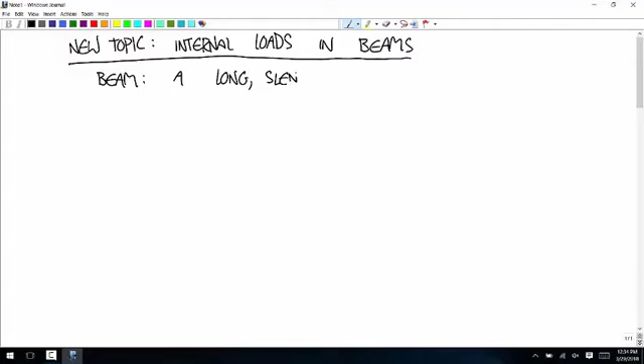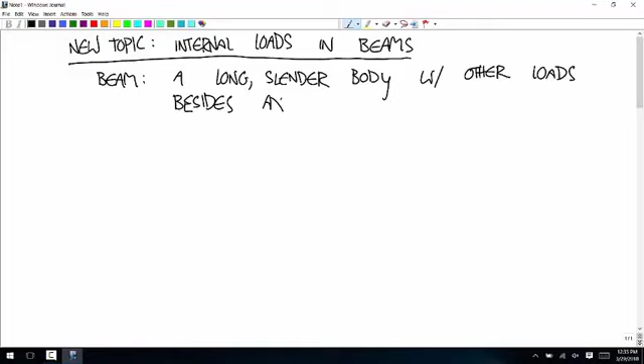And a beam is a long, slender body with other loads besides axial forces. If you have a long, slender body like this and the only loads on it are parallel to the axis, then if the loads are always going to be just axial like that, you don't call it a beam. People tend to just say an I-beam is an I-beam no matter how you load it. But when I talk about beams as a general topic, I'm talking about long, slender bodies that, in addition to axial loads, can also have forces like this, and couples and stuff like that. So these bodies have to support loads that are more than just axial.

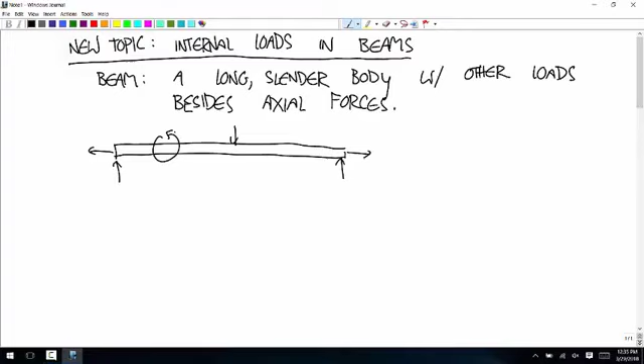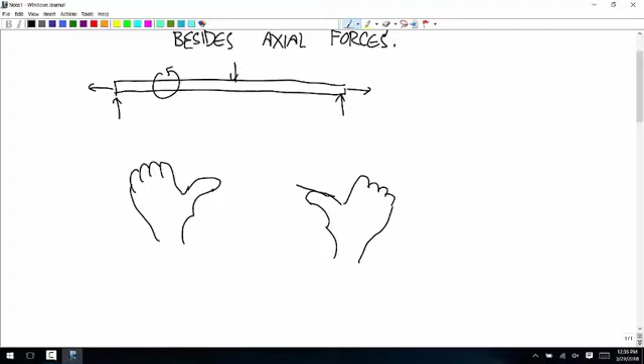And the motivation for internal loads, the best I can think of, is this. So here's you: I'm so strong, I'm going to break this pencil. Don't think you're all cool, anyone can break a pencil. Okay, so here's the pencil. Okay, that was stupid. Yeah, that's true, it's a pretty long pencil.

Okay, so if you try to break this pencil by flexing it, here's the motivation, here's what we're doing. The motivation isn't trying to break a pencil, this is just helping you understand what internal load is about. So what does a free body diagram of that stick look like? So there's the stick. Your fingers are applying a downward force and your thumb's applying an upward force, and there's symmetry, so it looks the same on the other side. Maybe we could call this F, F, F, F, something like that.

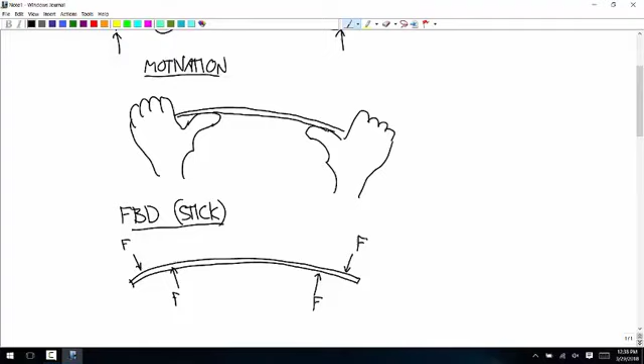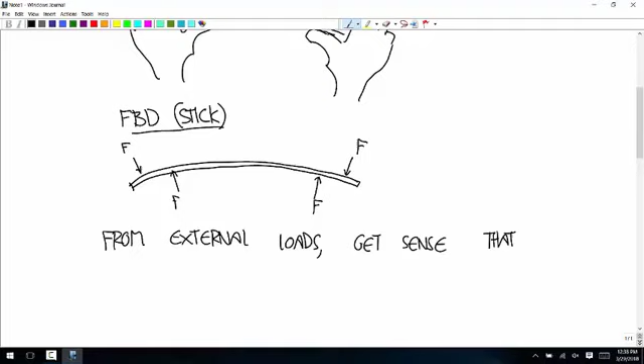Okay, so if all we have to go on are the external loads on this pencil—it's drawn wrong, okay—if all you have to go on are those external loads, and you were asked where this pencil was going to break, if you didn't have any experience bending sticks or whatever like that, you would look at this and you'd say there's 4 places where this could break, one of those 4 places. From the external loads, you'd get the sense that the fracture would occur at one of those 4 locations of those forces F.

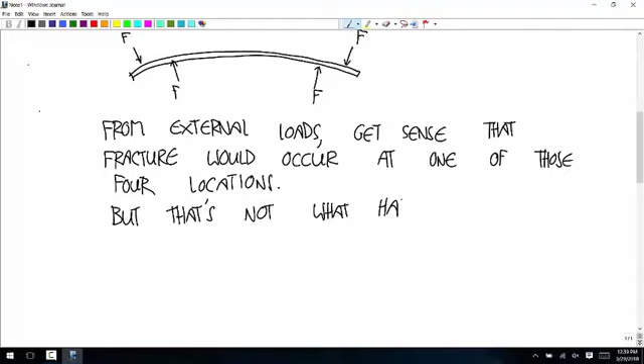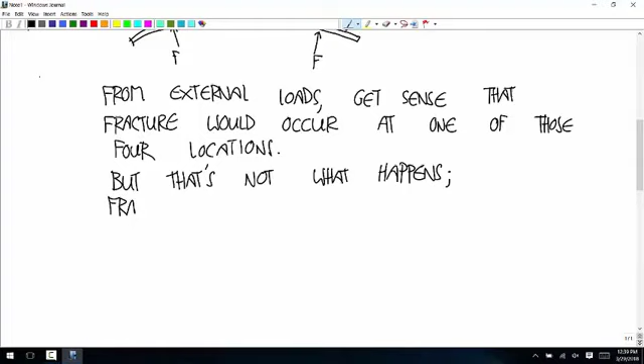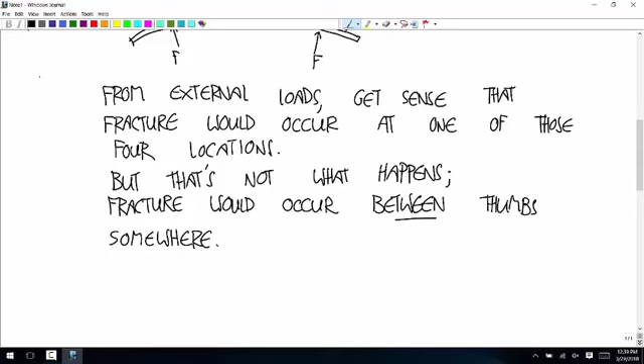But that doesn't agree with experience. That's not what happens. In practice, if you do this, the fracture is going to happen somewhere in between your thumbs. So the fracture would occur between the thumbs somewhere. So if it's not the external loads that determine where something's going to break, we need some other way to measure where a fracture is going to happen. We need another way to predict this fracture.

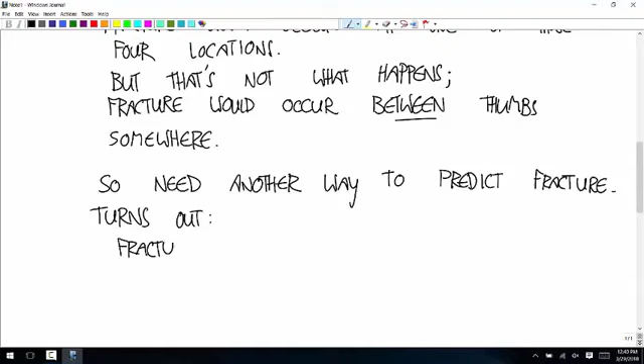And it turns out that fracture happens, that fracture occurs in spots where the material itself applies large loads to the adjacent material. And these loads that the material applies to itself are called internal loads. And so that's what this is about. Really, this is kind of like the first topic where we're starting to get at the question: where is this thing going to break? Or, I guess, is this thing going to break? And if it is, where is that fracture going to start?

Which is going to be a big topic of mechanics, one whole branch of mechanics from now on. So you start with this, and then you go to stress and strain analysis and deformation, and then you keep going in that direction after.

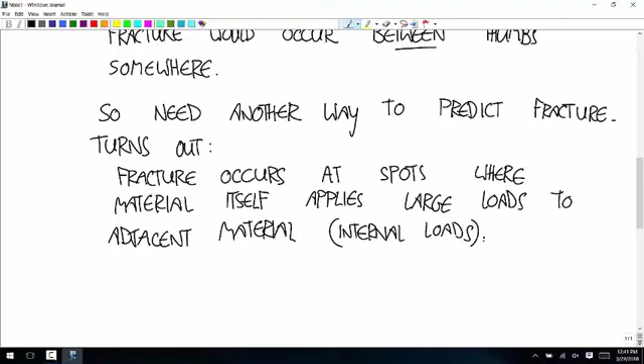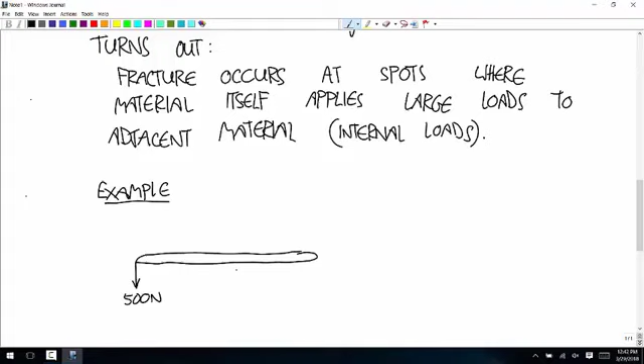Okay, so let's think about how to get at this. Let's say we have this beam, and there's a 500 Newton force at the two ends, and an upward force of 1,000. If you plug this stuff into Newton's laws, you'd see that it's in equilibrium.

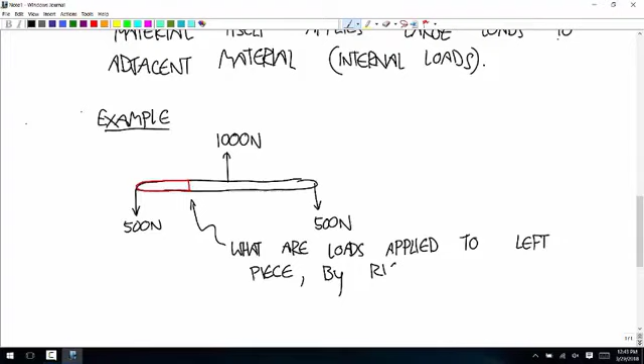And let's say that we want to know, at this point here, what are the loads applied to the left piece by the right piece at that chosen line.

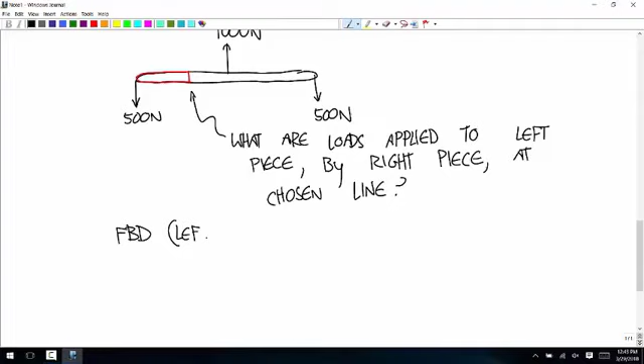Okay, well, let's draw a free body diagram of the left piece. So this is what we're isolating. And, you know, I always say don't do this in free body diagrams, but I'm going to draw an outline of the stuff that we're ignoring just to help you keep your bearings of what we're looking at. Okay, so our free body is that black piece.

There's a downward force on the piece that we're analyzing of 500. That red line happens before we get to the 1,000 Newton force going up. So that 1,000 Newton force would be like here, but we're not looking at that. And then there'd be another 500 Newton force like here, and we're not looking at that.

Okay, so now go around the boundary and look for places that the surroundings apply loads to our chosen body. There's one location that I've missed.

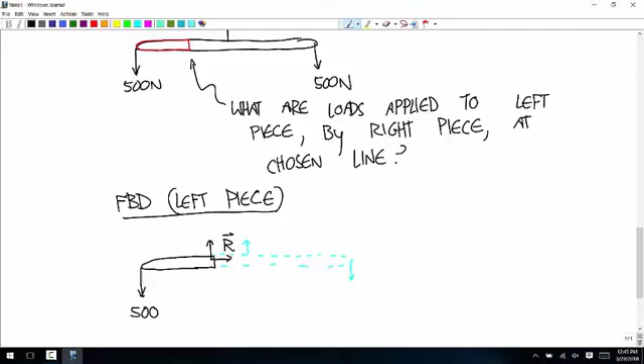That's right. At the contact between what we're—right at that line that arrow is pointing to above—the piece that we're isolating makes a fixed joint with the piece that we're ignoring. So what are the loads that a fixed joint applies? Yep, so we have an unknown force vector, R, and we also have a couple, M.

We want to calculate R and M. Those are the internal loads at that line.

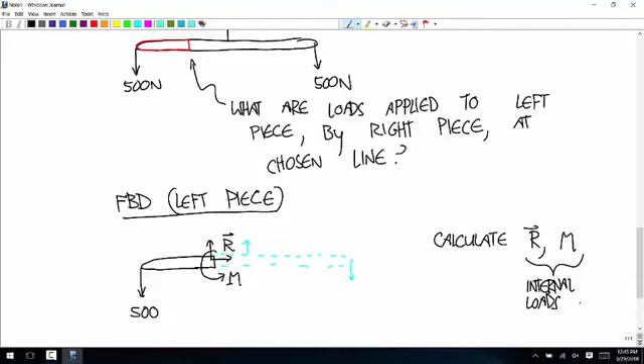So Newton's second law says 0, negative 500 plus Rx, Ry is equal to zero.

And the moment equation—I'll use this as the about point. So there's no moment produced by the 500 Newton force because it acts at the about point. There's the couple M, and I didn't give a distance here. Let's give this distance.

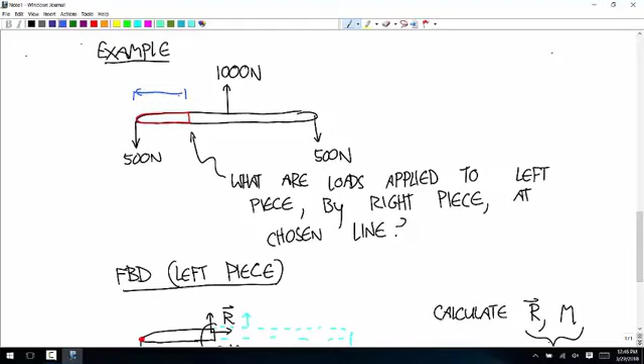So let's say that this is 0.25 meters. This is 0.25. This is 0.5.

Okay, so the x component of that force R doesn't produce a moment because its line of action goes right through the about point. The y component does, though. You see that the y component of that force would make this beam rotate around the about point. What's the moment arm of that y component of R?

So if we have this upward force at the end here, the horizontal distance is 0.25. Okay, so the moment arm is 0.25.

The force vector is Ry. And would that, if that Ry is positive, would that make it rotate clockwise or counterclockwise? Counterclockwise, so this is positive. That's because this is a counterclockwise rotation. And so that's equal to 0.

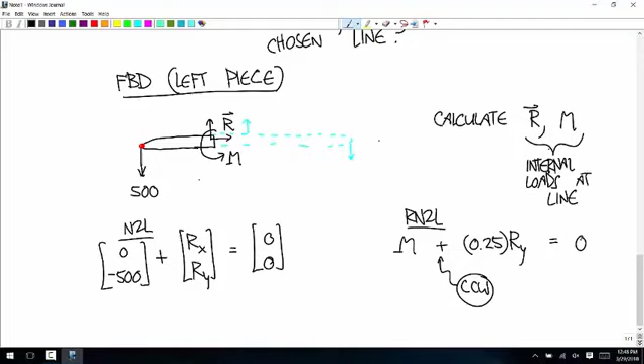And so now this system of three equations tells us that the vector R is equal to 0, positive 500. And the moment M is equal to negative 125 Newton meters.

If we drew a free body diagram for the right half, would the moment be the same? Okay, so that totally anticipates the next thing that we have to talk about with this. So let me ask other questions, and we'll get back to that. That's kind of the next big thing we have to address.

Anybody have any other questions about that idea? So what we have is somehow—we don't know how yet, we don't know how this compares to other parts or how much the material can withstand or anything like that—but somehow these loads represent how likely that beam is to break at that line that we chose, at that point along the beam that we chose.

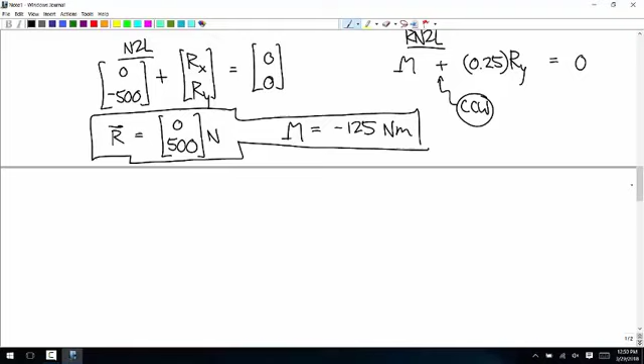Okay, but we're starting out with just a single point. So this is the basic idea. The basic idea is at every point on the beam...

And just as an aside, we're not really talking about points. We're really talking about vertical lines or cross sections. Yeah, exactly.

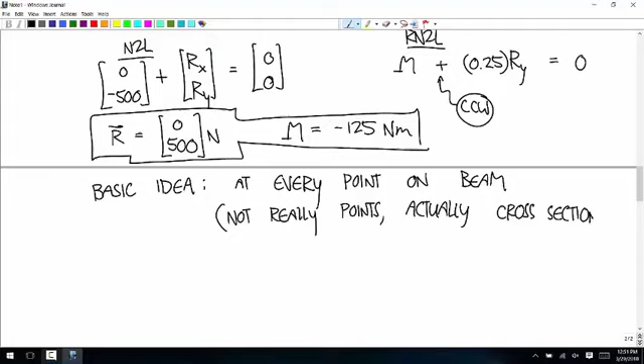We want to calculate the loads applied to the material by the fixed joint with the adjacent material. Okay. And I would recommend that you try to remember that, because...

The next thing we're going to do is going to sort of obscure that simple idea a little bit. But one complication comes up, and that is that we really want to know—we want a set of internal loads that represent, so we want a set of values that represent the internal loads at that cross section, no matter how we calculate it. And the problem is...

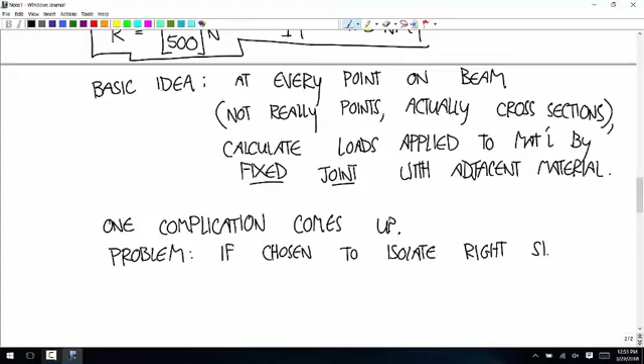If we had chosen to isolate the right side, and calculate the loads applied by the left side, all of our values would have been equal and opposite.

And so we don't really want that. We want to be able to calculate this any way we choose and have the results be consistent. So because of that, we're going to choose a new sign convention that's independent of the vector directions, the axis directions.

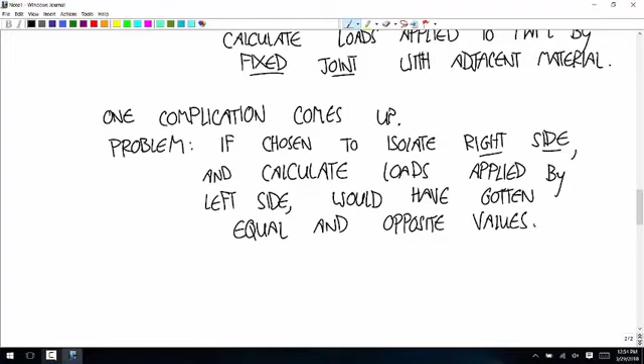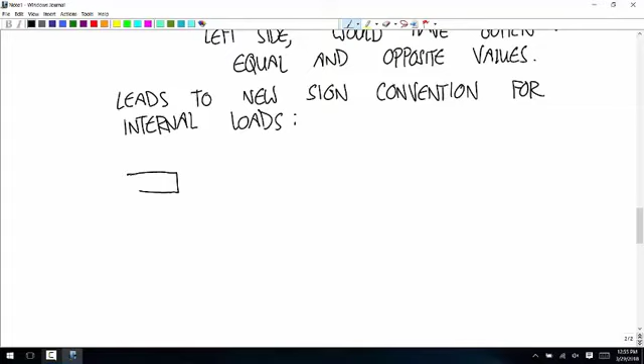And so at the end of the beam, we're going to define those loads applied by the fixed joint as a tension, T, a shear force, V, and a moment, M.

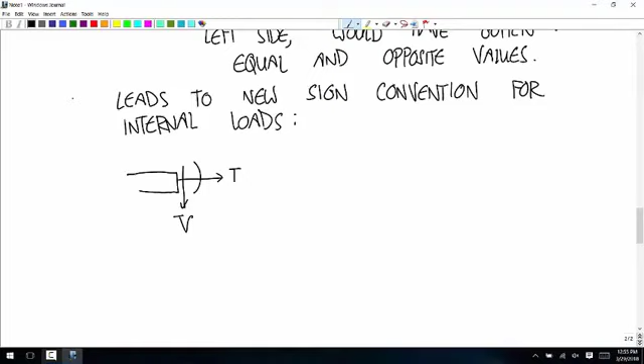And the way that eliminates the inconsistency between going from the left and the right is if we were going the other direction, if we isolated the right part, we could call a positive value of internal tension a force this way, positive value of shear force up, and a bending moment this way, and then we get the same values either way. But I just wanted to bring this up to point out that still all we're doing is calculating a force vector and a couple, because that's what's applied by a fixed joint.

We're just using a new weird sign convention because there's this inconsistency that comes up that we wanted to deal with. So you're going to have to get used to this new sign convention, but still all we're doing is representing a force vector and a couple. Any questions about that?

Oh, this little line? I don't know, because I just like it to look nice. It's not a hat, it's a little flourish. He's self-conscious about his appearance.

Okay, so let's do that same problem that we just did, but now we'll use that new sign convention.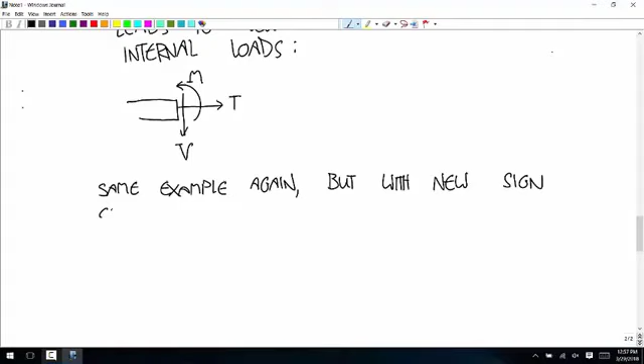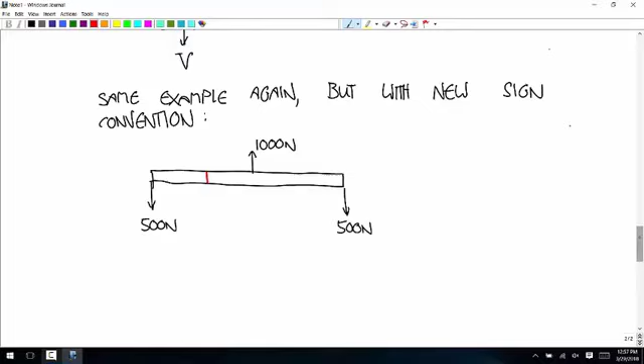Again, we have the 500 Newton force down at each end, and then the 1,000 Newton force up. We want to calculate the internal loads at that line. So I'll draw a free body diagram of the left. We have the 500 Newton force down. We haven't gotten to the 1,000 Newton force. And then we have the tension, the shear force, and the bending moment.

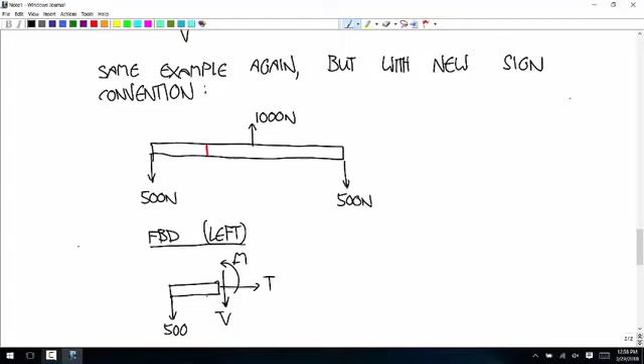And those new directions, well, the only one that changes directions is what we called RY before. Now the default direction is down. So whereas before an upward force would have been called positive RY, now an upward force would be called a negative V. So Newton's second law...

is 0, negative 500, plus 0, negative V, is equal to zero. I forgot the T. Is equal to zero. And so we get that T is equal to 0. V is equal to negative 500.

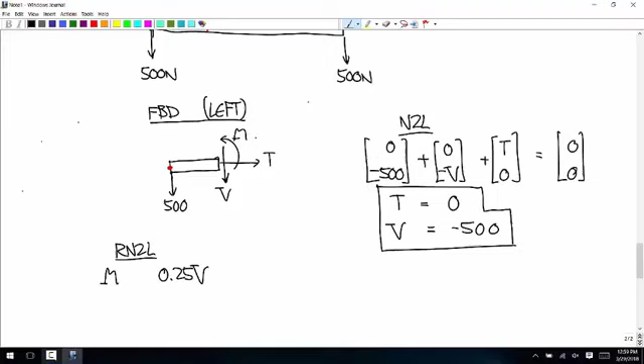And the moment equation, we're always going to use the about point at the left end of the whole beam. So there's no moment produced by the 500. There's a positive bending moment, M. And then there's a moment arm of 0.25 for the force V. And if that value V is positive, that force would be down, and that would cause a clockwise rotation, so this is negative. And this is equal to 0, and you get M is equal to negative 125.

That's kind of all there is conceptually to calculating the internal loads at a single X value, at a single point along the beam. But now we want to start to try to figure out how to calculate the internal loads for every point along the beam. And obviously we can't just one by one do this at every point because there's infinitely many points. So we need some way to calculate these internal loads as functions of X.

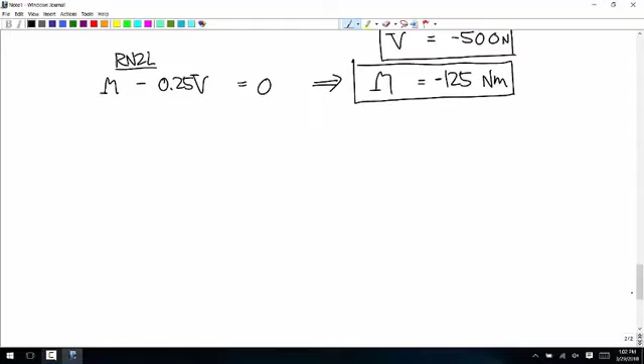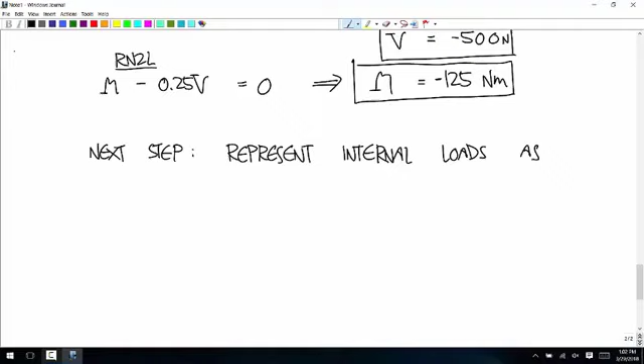But let's start out by just calculating those internal loads for a few different values of X, and I'm going to see what's similar and what's different as we look at these different values. So the next step is to represent the internal loads as functions of X.

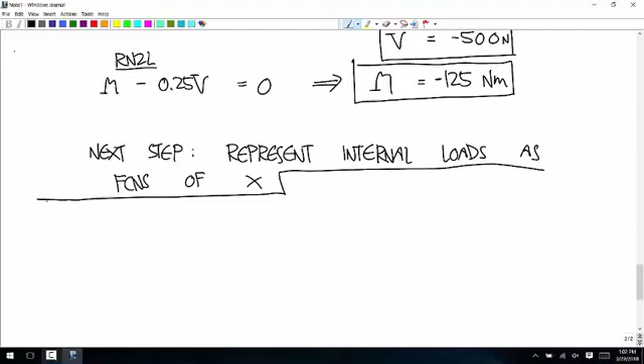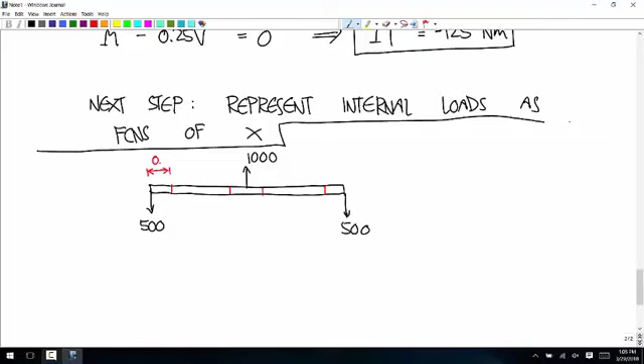So let's think about this beam again, the same one. And let's calculate the internal loads, let's say here. And we already did it here, and let's do it here. And let's do it here and here. Okay, so this distance is 0.1, this distance is 0.1, this is 0.1, and this is 0.1.

Okay, and we're going to look at the free body diagrams and see where there are not just numeric changes, but qualitative changes in what the free body diagram looks like. That's going to tell us something about the way that we're going to have to treat the internal loads as we generally deal with all these X values. So let me number these. Let's call this 1, 2, 3, and 4.

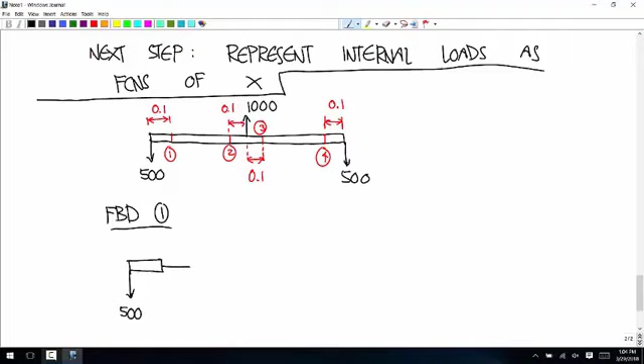So the free body diagram at line 1, what does that look like? We have the downward force of 500. We haven't gotten to the 1,000 yet, so the only other loads are these internal loads, T, V, and M. And now let's look at a free body diagram of point 2.

We're still isolating the body all the way from the left end, but we're just changing where the right end of the thing we're isolating is. So we still have this 500 Newton force going down. We haven't made it to the 1,000 Newton force yet, so the only other loads are T, V, and M.

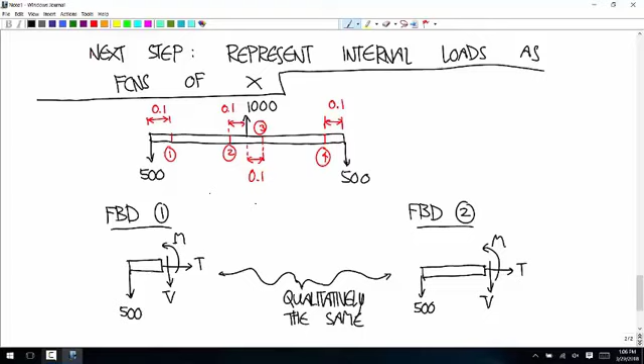Okay, so these two are qualitatively the same. The numbers won't be the same, but the free body diagrams look the same. You might think maybe it'll look the same for all of them, but we're going to see that these next two, 3 and 4, are going to look different than these first two. So let's draw those free body diagrams.

So for body 3, we're still isolating through all the internal loads, the piece we're isolating goes all the way from the left end of the beam up to the line that we care about. So we still have that 500 Newton force. Now we also have this 1,000 Newton force, and then we have the internal loads, T, V, and M. So once we started dealing with X values bigger than 0.5, we have a new look to the free body diagram.

Okay, maybe we can figure out a way to treat those first two the same mathematically, but this one is going to have to be different. And the same thing when we isolate body 4, it's going to look like this. The numbers would be different, but we're still going to have the 500, the 1,000, and the internal loads.

Okay, so now we have the 500 newtons, we have the 1,000 that's closer towards the middle of what we're isolating, and then we have the internal loads. And these two are qualitatively the same.

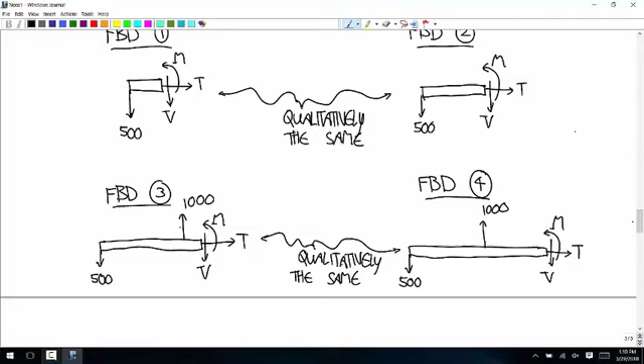So the result is that T, V, and M are going to be piecewise functions of X.

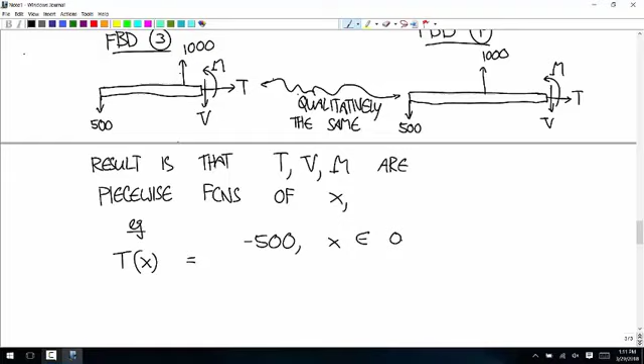And the subfunctions—before I write that, remember what piecewise functions look like? So we're talking about, say, T of X is going to be equal to negative 500 for X on the interval from 0 to 0.3, positive 500 for X on the interval 0.3 to 0.4, or something like that. Okay, and these things in here are called the subfunctions.

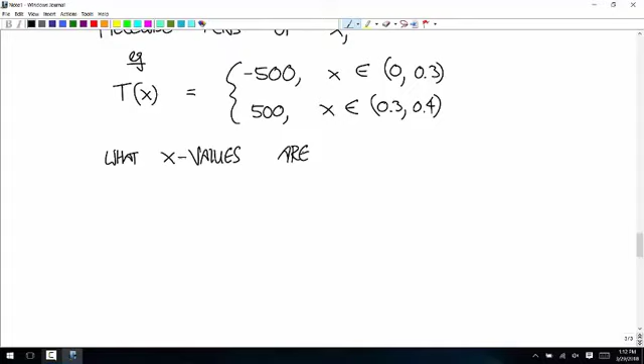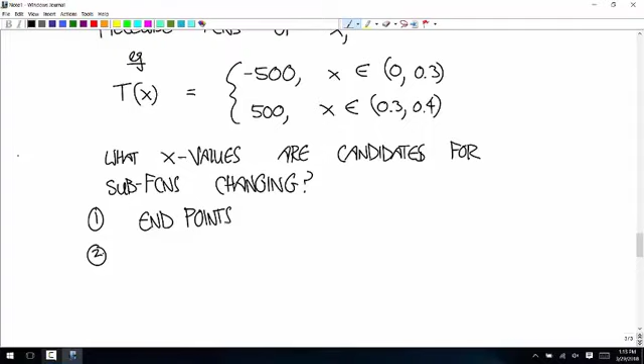So let me reword this: what X values are candidates for the subfunctions changing? Well, first you have to deal with the endpoints—that almost doesn't even need to be said. And then anywhere where there's any kind of point load. And then the last one, we're not going to do this yet, but when we start using distributed loads, any places where the distributed load function changes.

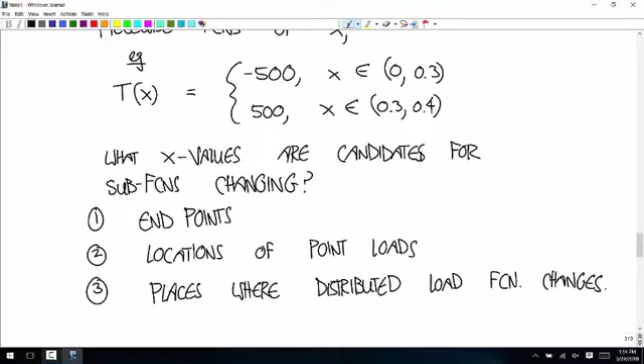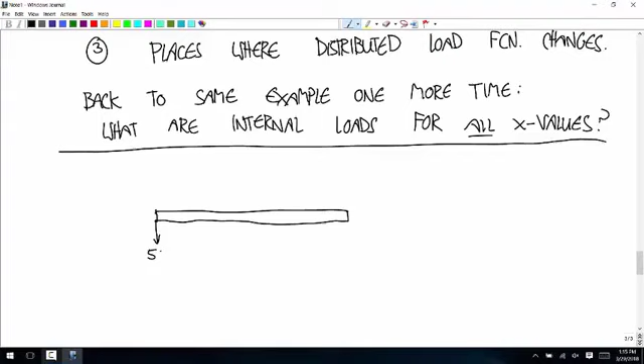Okay, so let's use this one example one more time, and we'll try to come up with functions for internal tension, shear force, and bending moment. So what are the internal loads for all X values? We have 500 down, 500 down at the other end, and then 1,000 up.

Let's find all the places that are candidates for those subfunctions changing, first of all. We have the two endpoints. And now, besides those two endpoints, are there any other places where there are point loads? In the center, yep. And then we're not using distributed loads, but you'd also look for where the distributed load function changes. You could think of this as n equals 3, and so we're going to need n minus 1, or 2, free body diagrams. And these free body diagrams are called cuts.

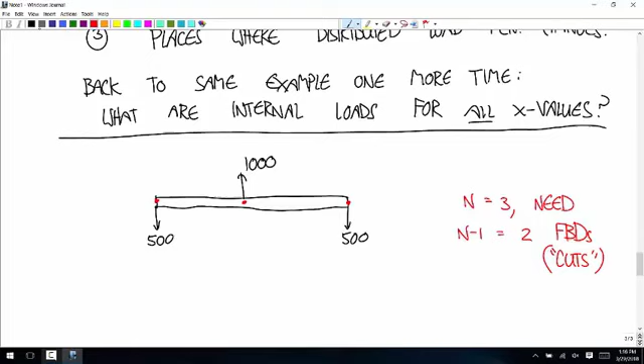Okay, so cut 1 is valid for all x's between 0 and 0.5. And I'm just going to draw one general free body diagram.

So there's a 500 Newton force down. No matter what x value we choose in between 0 and 0.5, we haven't made it to the 1,000 Newton force yet. So the only other force we have is T, V, and then the couple M.

And how long is this piece? Well, that varies, right? Because this piece can have any length in between basically 0 to basically 0.5. So we're just going to call this x. This distance is x. And we're going to calculate the internal loads as a function of x. Okay?

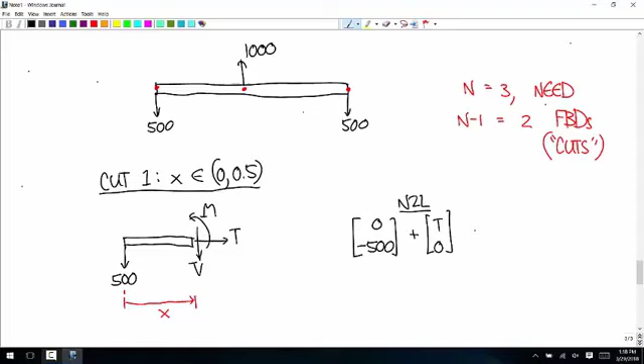So Newton's second law: 0, negative 500 plus T, 0 plus 0, negative V is equal to zero. And so T is equal to 0, V is equal to negative 500.

So far, that distance x hasn't come into it. And now we'll go to the moment equation.

And like always, for internal loads, our about point is going to be the far left end. The 500 Newton force doesn't produce a moment. M just adds on as M. Then V has a moment arm of x, a magnitude of V, and that downward force would make it rotate clockwise, so minus Vx. T doesn't produce a moment, so those two add up to be 0. So M is equal to Vx.

And so the bending moment is equal to negative 500x. Okay, so that's our first set of subfunctions. And these subfunctions are valid for any x inside the interval 0 to 0.5, not including the endpoints. Okay.

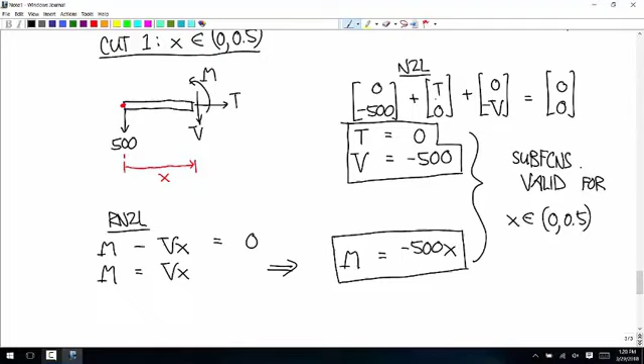And now we have to do a cut that represents x values from 0.5 to 1. So cut 2 is for x's in this range from 0.5 to 1.

Now you might think that the free body diagram I'm going to draw for this second cut would start at the value x equals 0.5 and go some distance past. So remember, in every example we've done so far, where we chose those finite points to analyze the internal loads, we started all the way at the left of the beam, and we're going to keep doing that. Okay. So this range from 0.5 to 1 just represents the possibilities of where the right end is. Okay. On the left end, we're always going to start at the left end of the beam.

So this free body diagram has a 500 Newton force down. Somewhere before the end, it has a 1,000 Newton force up. So that's different than the last free body diagram. And then we have the internal loads, T, V, and M.

And now let's think about the distances. What's the distance from the left end to this 1,000 Newton force? 0.5, yep. So that doesn't change, right? And no matter what x is, no matter where the endpoint is, it doesn't change where that 1,000 Newton force is. So that distance stays constant. But what does change is the distance from the left end to the right end, and we're still going to call that x.

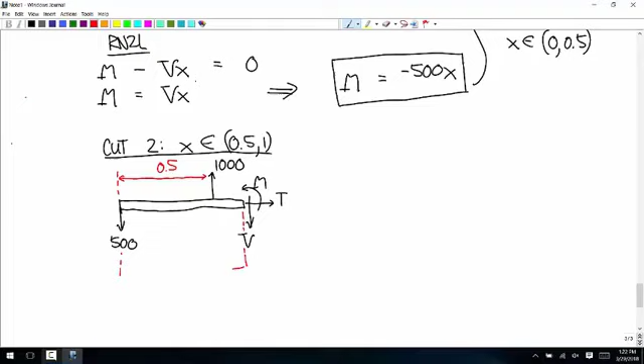Now Newton's second law says 0, negative 500 plus 0, 1,000 plus T, 0 plus 0, negative V is equal to zero. So T is equal to 0 again. V is equal to positive 500.

And then the moment equation with the about point at the left end. The 500 doesn't produce a moment. The 1000 has a moment arm of 0.5. And is that clockwise or counterclockwise? Counter, so that's positive. Plus M minus Vx, that the plus M and the minus Vx always show up, and that's equal to 0.

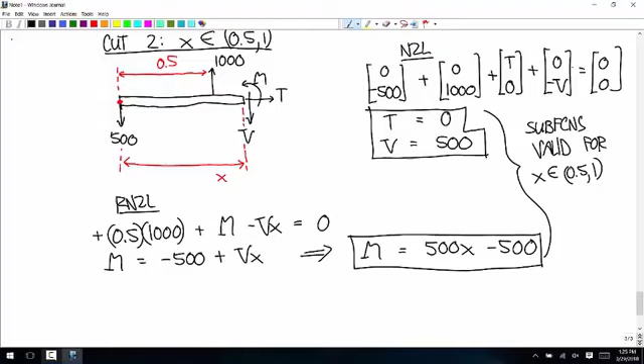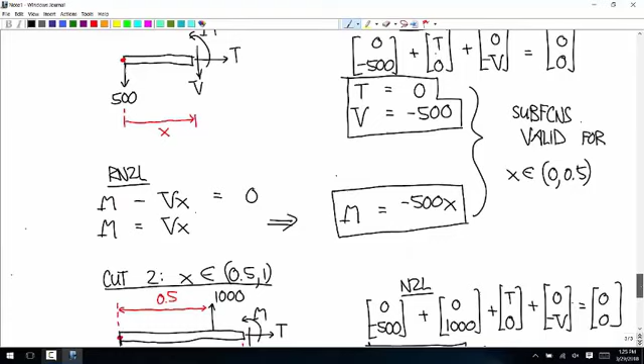And so now we're not going to take the time to write them this way usually, but you could now write that T as a function of x is equal to 0 no matter what. V as a function of x is equal to negative 500 for x between 0 and 0.5, and positive 500 for x between 0.5 and 1. And then bending moment as a function of x is equal to negative 500x for x between 0 and 0.5, and 500x minus 500 for x between 0.5 and 1.

You can visualize this by plotting these functions. So t, if that's 0.5, and that's 1 for the x value, the internal tension is 0 the whole way because we didn't have any horizontal forces.

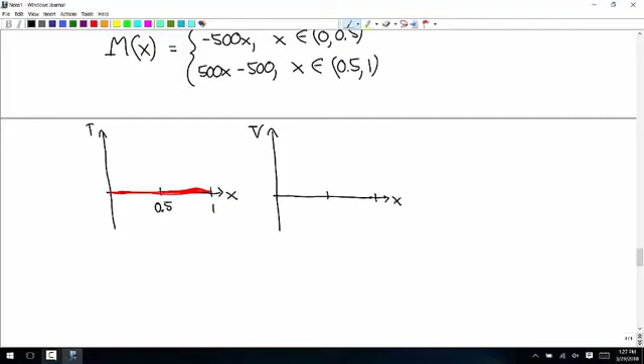The shear force as a function of x is negative 500 on the first half, positive 500 on the second half.

We're just going to connect those to emphasize how sloppy we're being about the discontinuity there. We're going to pretend, and actually, the fact is, there's no such thing as a point force. That's an idealization that we make. Any force is spread out over some small amount of distance. So if you had this 1,000 Newton force spread out over a millimeter or whatever, what you would really get if you did this calculation, which we can do once we start doing distributed loads, is something that would look almost exactly like this. It would just have a slight, tiny little slope going diagonally over the length of a millimeter. So this really is about what it looks like. It's just that in our idealization, that's a vertical line.

Distributed loads: we'll have beams that have distributed loads on them, and if you change the representation of the distributed load, then at that point the subfunctions are going to change. But we don't have that yet. That's only once we start doing distributed loads.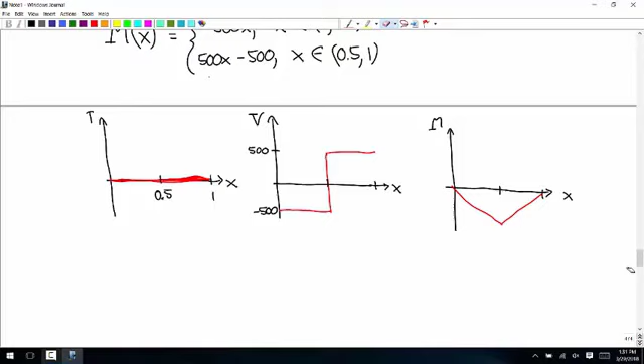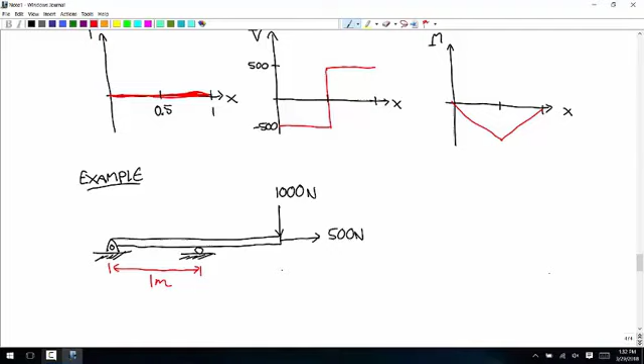Okay, let's do one now. Normally you're not given the external loads at the start. So let's say we have one where there's a pin joint at one end and a roller at the middle. Then at this end there's a downward force of 1,000 newtons and a horizontal force of 500 newtons. So if this is 1 meter and this is 1 meter, what are the internal loads?

Before we get into the internal loads and worry about cuts and stuff, we have to find the external loads first. So I'll draw a free body diagram of the whole thing.

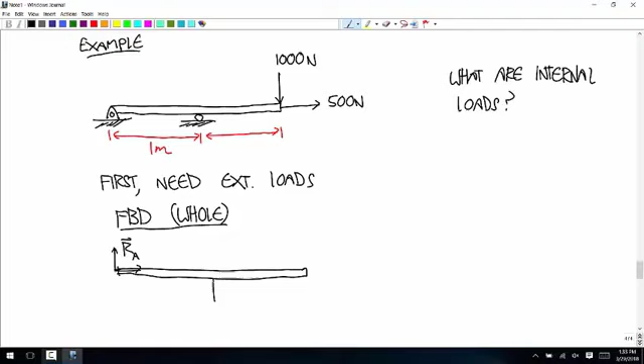At the pin joint, we have an unknown force vector, I'll call that RA. At the roller, we have an upward force, I'll call that RB. And then here we have the 1,000 down and the 500 to the right. I'll put the about point here for the rotational equation.

By the way, for all of these I'm doing the moments by just calculating the moment arm and the force, and figuring out whether it's clockwise or counterclockwise to get the sign. If you want, you can do all of those using rho and force and moment, writing out the table. By the end of this, you'll find it's a lot quicker and more convenient with these beam problems to just figure out the moment arm, the force, and the direction. But for now, if you want to write out the whole table, do it. It takes a couple extra seconds and it works perfectly.

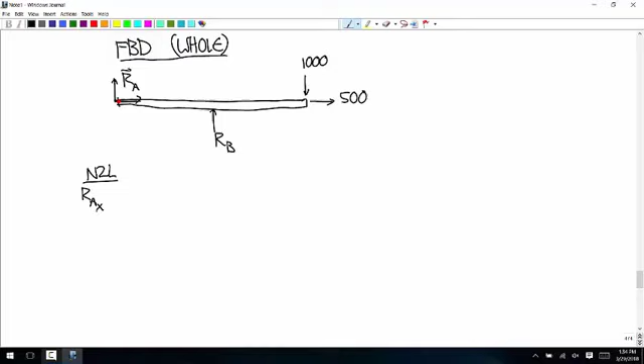Okay, so Newton's second law says RAX, RAY plus 0, RB, plus—I'm going to lump these two forces together—500, negative 1,000, is equal to zero.

And then the moment equation: there's no moment produced by the force at the about point. What's the moment arm for RB? Yep, 1 times RB. Is that clockwise or counterclockwise? Counter, so that's positive. The horizontal force doesn't produce a moment, the vertical one does. What's the moment arm for the 1,000? 2, yep, the force is 1,000. Is that clockwise or counterclockwise? Clockwise, so that's negative. And those add up to 0.

So RB is equal to 2,000. And so RA is negative 500 for the X component and negative 1,000 for the Y component.

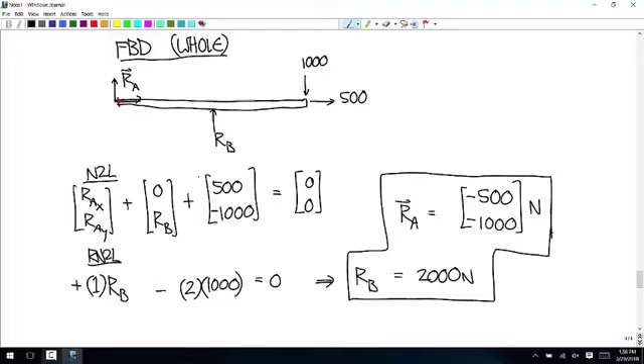Okay, so now here's what we know. We have a 500 Newton force to the left and a 1,000 Newton force down at the left end. In the middle, a 2,000 Newton force up. And at the right end, 500 Newton force to the right and a 1,000 Newton force down.

Now let's figure out the candidates for the subfunctions changing: the endpoints, and besides the endpoints, are there any other points with point loads? Yep, here. So n is equal to 3 again, which means we're going to need 2 cuts.

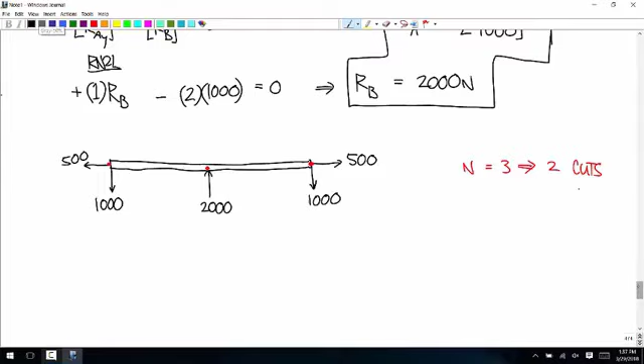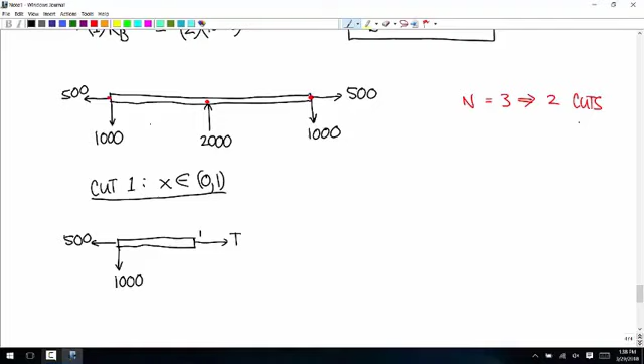Cut 1 is valid for x's in what range? 0 to 1, yep. The free body diagram has the 500 and the 1,000 at the left end. We haven't made it to the 2,000 yet, so now we just have T, V, and M.

Newton's second law says negative 500, negative 1,000, plus T, plus 0, negative V, is equal to zero. So T is equal to 500, and V is equal to negative 1,000.

So all we're doing now is making a cut where the right end of our piece falls before we get to the 2,000. So the 2,000 Newton force is over here somewhere, and that's not part of the body we're isolating, so we need to assume those on the left side. The first cut starts at the left end, and the right end is some value we don't know, but it's not enough to make it to the 2,000. That'll happen in our second cut.

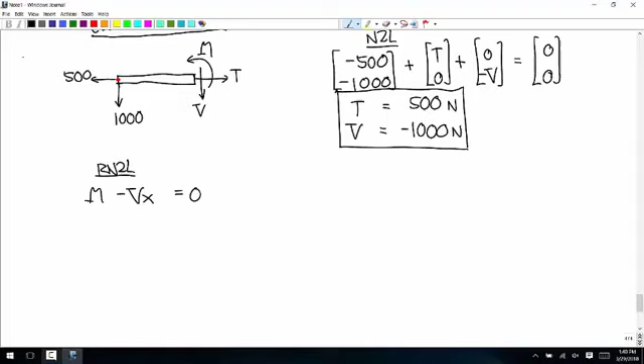For the moment equation, we'll always use the point at the left end. Those two forces at the left end don't produce a moment. Then we have M minus Vx equals 0, so M is equal to Vx, and M is equal to negative 1,000x. That subfunction is valid on the interval x between 0 and 1.

Now we'll do the second cut. This is valid for x's between 1 and 2. But our free body diagram still goes all the way from the left end, it's just the right end that's between 1 and 2.

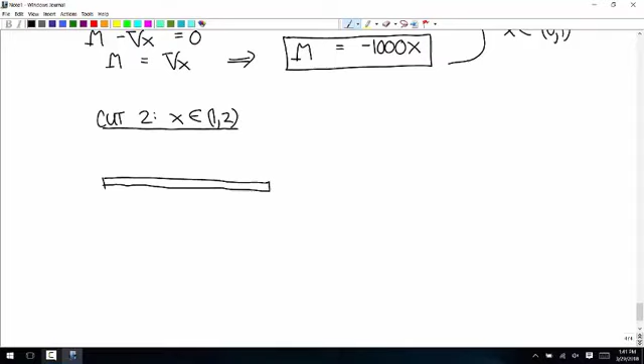So we have the 500 and the 1,000 at the left end. Now the right end is past the 2,000 Newton force, so that's in there, and then we have the internal loads T, V, and M. What's the distance between the left end and the 2,000 Newton force? 1 meter, yep. And what's the distance between the left end and the right end? X, yep.

So Newton's second law says negative 500, negative 1,000, plus 2,000, plus T, plus 0, negative V, is equal to zero. And so T is equal to 500, and V is equal to 1,000.

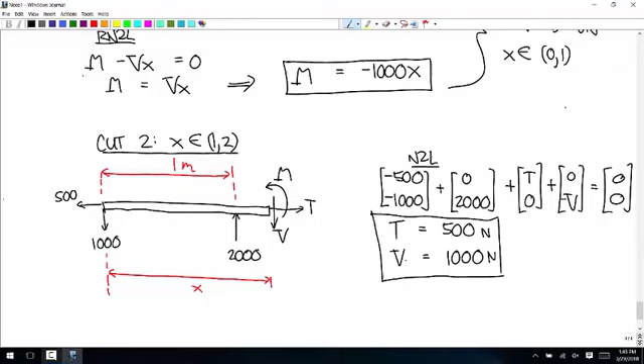For the moment equation, our point is at the left, so these two don't produce a moment. What's the moment arm of the 2,000 Newton force? 1. And is that clockwise or counterclockwise? Counter, so that's positive. Then we have plus M minus Vx is equal to 0. So M is equal to negative 2,000 plus Vx, so M is equal to 1,000x minus 2,000.

And these subfunctions are valid on the interval x from 1 to 2.

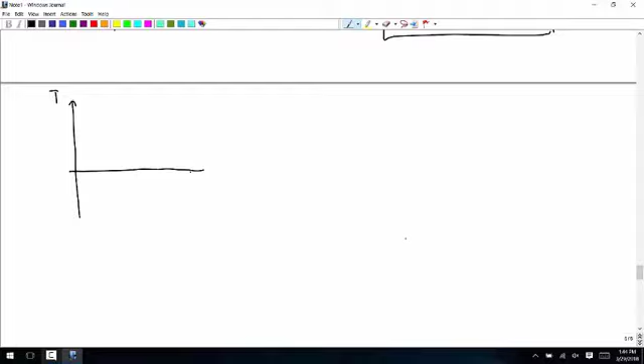So let's plot these out. The internal tension on the first half of the beam was 500, and on the second half, also 500, so that's constant the whole way at 500 Newtons. By the way, if you get a positive value of tension, it means the beam is in tension, being pulled apart. If you get a negative value, it means it's in compression.

Then the shear force: on the first half, it's negative 1,000. On the second half, it's positive 1,000.

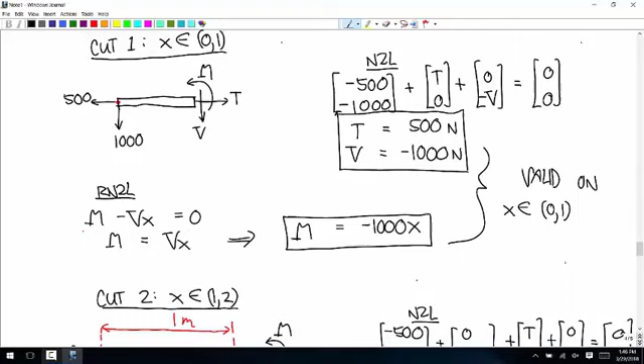And then the bending moment: on the first half, it's a linear function that goes from 0 to negative 1,000. And then the second one, if you plug that into a graphing function, it turns out that's also a linear function that starts here and goes back to 0. So the story on this one is about the same as the one before—we did have tension in this one, we didn't before, but we're most concerned about this breaking near where that 2,000 Newton force is applied.